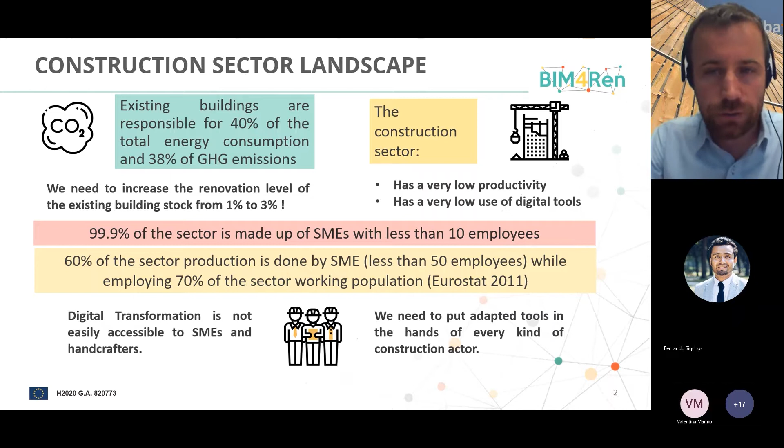And just to go back, the productivity has actually declined, and the labor force is mostly self-employed. So to put it very simply, not in graphs but in the shoes of those practitioners: if you have a 10 people company and you need to dedicate a few weeks to learn new tools, it's an investment. If you need to pay for those softwares, this is quite an investment.

And it's an investment which is even harder when there's not so much culture for research and development, or this kind of investment. So this is something to be seen as, not a disease obviously, but something that hinders the capacity of the sector, and that could clearly be improved.

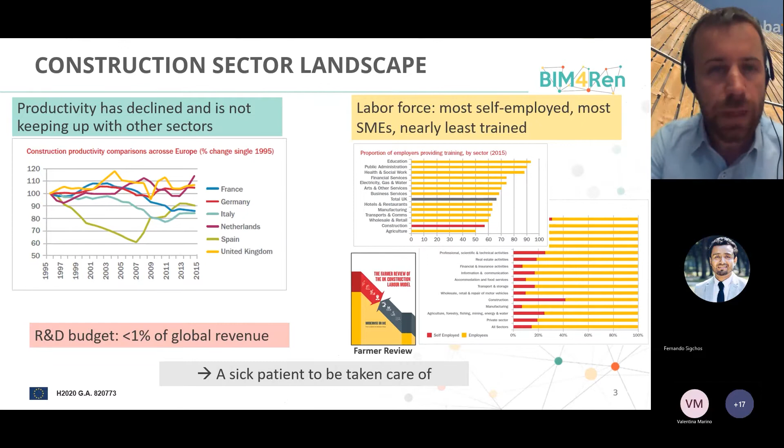Well, the benefits of digitalization have been proven. It improves efficiency, meaning efficiency in the collaboration, efficiency in avoiding waste, efficiency also for the energy environmental performance, and especially it allows narrowing the energy gap between what's expected and what is measured.

And behind this digitalization, there are lots of keywords, and more importantly, those are very deep knowledge areas for which there is plenty of investigation, but they seem to be quite far from the needs of the daily practitioners. So those technologies exist, but we do not use them, not to their full potential. And their full potential might not be to make them more complex, but rather more accessible.

So we need to find better ways to reskill and upskill the construction workforce. And so this is the idea, this concept of saying, okay, either we anticipate and progress, or we wait. And particularly to wait for this kind of change would not be a smart move.

Okay, so here we have BIM. BIM has a potential for renovation, but first let's try to say what BIM is. It can be seen as quite dual. It can refer both to the collaborative process, where across the life cycle of a building, starting from design, construction, operation, maintenance, and even end of life, it's a way to manage the information between the actors using a digital representation of a building, but it is also, as itself, a format, a semantically enriched model.

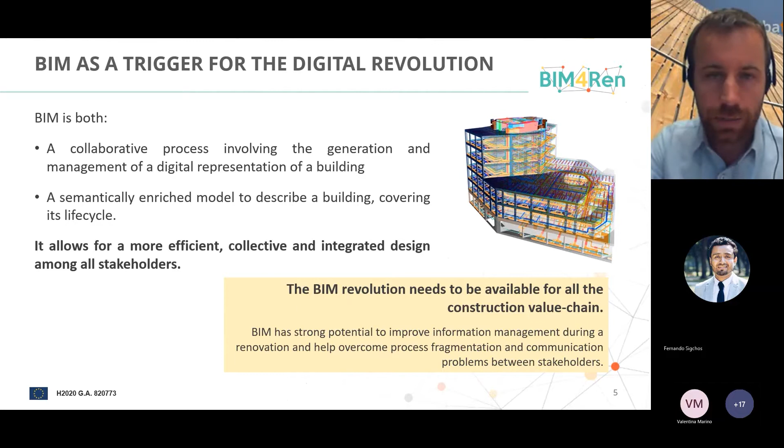And so why can BIM be quite relevant for renovation? The idea for this project starts with the very simple point, which is: for renovation, the building already exists. And with this building that already exists, there's plenty of information to gather. So what year was it built? If I want to do any renovation, what's the cost? What's the current energy performance? What's the geometry of this building? What's the state of, I don't know, like even the entrance, the window, the tightness?

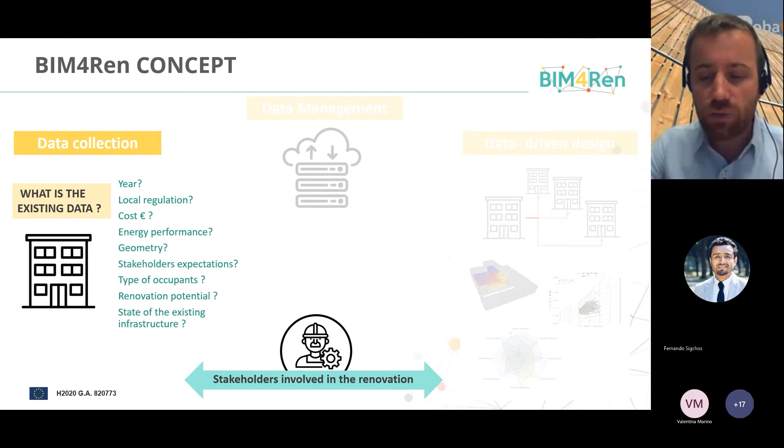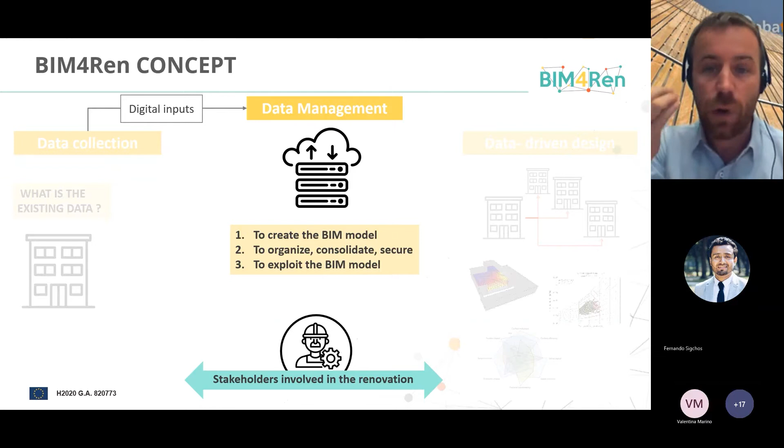What are the occupants? What do they expect from this renovation? All this information needs to be gathered. So there are ways to develop, to gather this information, and then to manage this information. Managing it means making it accessible to all stakeholders, organizing it, but also securing it. The idea is to exploit this information for the further steps.

The further steps involve designing the potential renovation scenarios. What if I change the windows? What if I improve the gas boiler? All those questions should be quite easily answered.

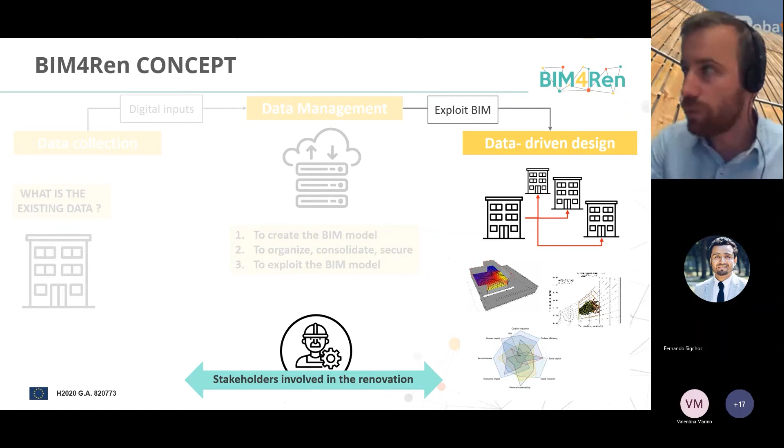With the idea that it should then be exploited by the on-site workers, the contractors, to use as designs for the renovation action itself. So those tools mostly focus on the preparation of the renovation, rather than full focus on on-site activities, and are integrated into a one-stop access platform.

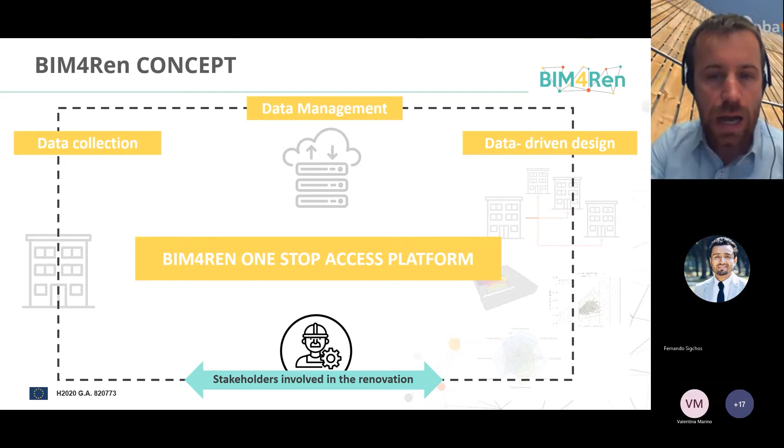This is now available, gathering more or less 30 tools developed in the project, covering data collection for geometry acquisition, HVAC system characterization, collecting the stakeholders' needs, and so on. It can also assess the potential energy performance of different renovation scenarios, and so on.

So you can have access. The easiest is to go to the BIM4Ren project, and from there have access to this platform where all tools are presented, with some workflows to guide the use of those tools.

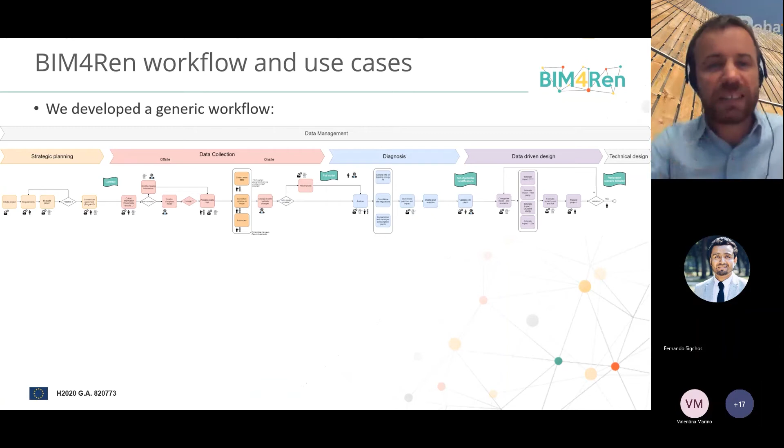To put it more practically, during the project we looked at practices related to the renovation project. We mapped as a workflow the different interactions between users and the data flowing around. We had an extended, generic workflow, but we made it a simple one.

It's about initial strategic planning, when the building owner mainly wonders: will I do this renovation? At this stage, they can contract a company. Then there is the data gathering, which can happen off-site or on-site, where you collect this information. The diagnosis is how you interpret this information to say, okay, this is the state of my building now, before renovation.

The design is about defining this renovation and then carrying it out, working on those renovation scenarios. Across all those steps, we need to manage this data and this information.

We used 3 different pilots, 3 different cases, not only different and complementary buildings, but also different actors related to them. In Spain, it was a privately owned building close to the seashore in San Sebastian, led by an SME specializing in facade renovation. In France, the focus was on a social housing organization managing almost 10 to 20 renovations yearly, looking at how to improve the process at an early stage.

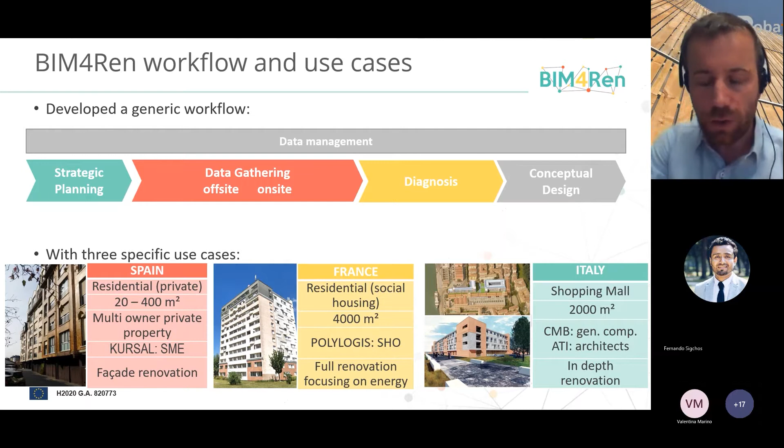In Italy, it was a large renovation, focusing on larger contractors, meaning a real estate contractor, a general contractor, and architects as a design team.

Just to highlight examples, you will see some demonstrations of tools. The idea is to start by gathering all information from the strategic planning stage. One tool is about extracting information from existing documents. You might have plenty of papers, printed or PDF information about your building, which might not be really exploited, like visit reports of the gas boiler and so on.

The idea is to scan this information and organize it so it can be easily retrieved afterward. This is the tool MassDoc.

Then there is WiseBIM, which I will present just after, about elevating a 2D layout into a BIM model. By doing off-site analysis, you get a model and information that lets you assess the current state of the building.

Then you can go further: I want to do some energy simulation. What if I improve the windows? What will be the impact? What should I do first?

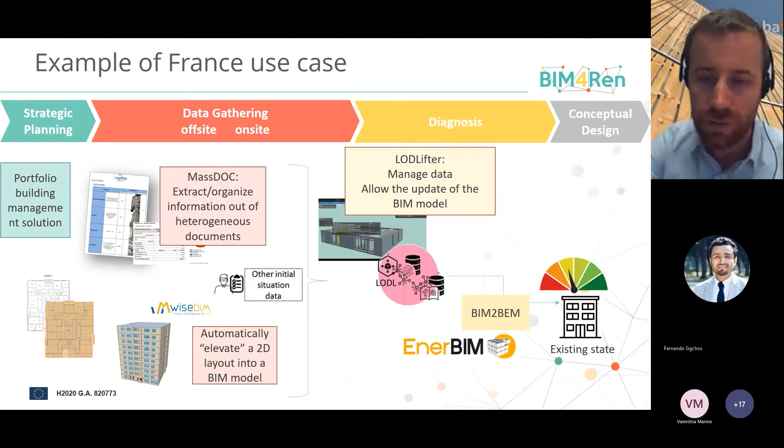Windows, the renovation of the walls, the change of the mechanical air renewal, and so on - this is the idea of assessing different renovation scenarios. And when you do that, you might wonder, what about the sun? If I want to add some PV panels? This is the BIM Solar tool that I will present afterwards.

But you can also assess what would be the cost, the energy consumption, the CO2 emission, the comfort, as a multi-criteria early analysis when you can consider so many potential renovation scenarios.

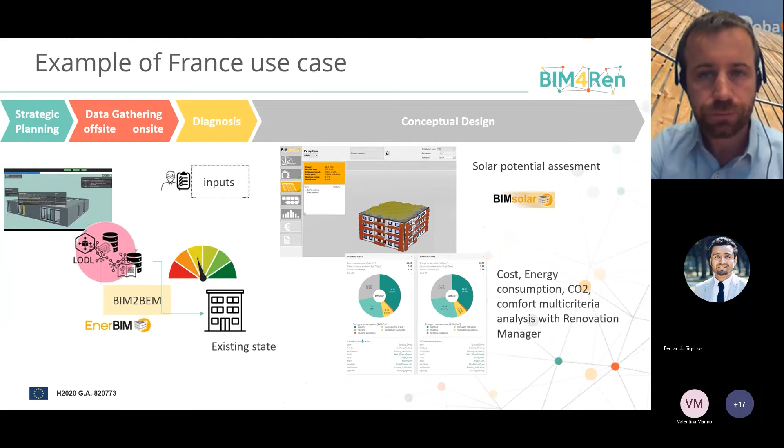And I'm getting close to the end. So what more or less we showed, our conclusion is that there are simple, fast, efficient tools that can help in this information management. This is something that we showed. There's plenty of room for improvement for sure. Those tools can be independent.

They can be used separately, but they are even more powerful when put together, meaning in a workflow. And the idea is what we want to focus on and strengthen is that while the project progresses, we can add more information. So if you start at the very beginning with a BIM model, even with low information, low level of detail, you can improve it.

By the end of the project, you have something which is more useful. It's important to note - it can be seen as a burden, an additional burden for the contractors. It's actually key to define what are the roles of the different actors. But in the end, it benefits all - it benefits the building owner, it benefits the contractors, and so on.

Valentina will present afterwards from GBC, that one of the outputs of the project is a white paper, but I would just mention a few of the key messages that we want to strengthen.

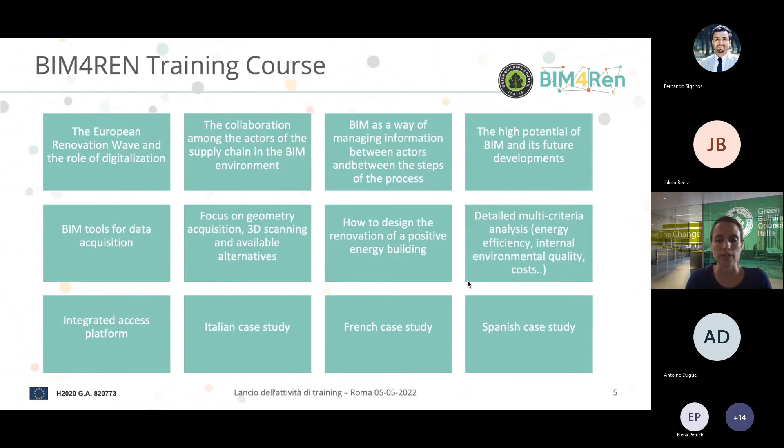The presentation of the 3 case studies in Italy, France, and Spain also presents the platforms, the OSAP and the tools. Specifically for the tools, there will be a part of the training where some of the presentations are collected that the tool developers did during the development of the project.

They showed some demos of these training tools, such as the one that will be presented by Antoine later on today. Where to access this training activity? We are about to finalize the website we call internally the legacy website, different from the main project website, where all the results of the project are collected. Within these results there will be a dedicated page for training, where you can find all the information and material on the training activity of the project in 4 languages: English, Italian, Spanish, and French.

The URL of the website is BIM4Renovation.eu. It will be active since the 30th of September 2022. What you will find inside, for each of the modules you saw before, is a little page where you can see the description of the module, the benefits, the duration of each module, and you will be able to download the presentation.

And for each of the tools, you will find again an explanatory presentation of the tool, and where available, also a video explaining the demo of how this tool works. So very soon, online, all the material from the training activity of BIM4Ren will be available.

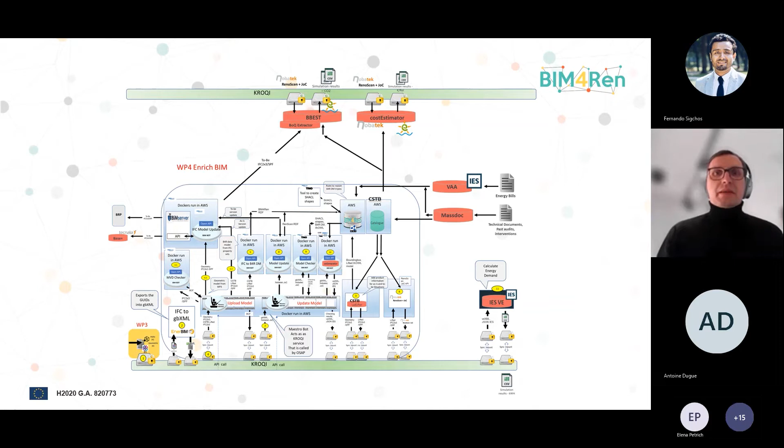Now, central to this, and you've seen the slides before, is this idea of binding different sorts of technology, different methods, different processes together into a platform. I'm going to scare you now for just a few seconds, because this is what it looks like on the back end, the technical view of our one-stop access platform. But since hardly anyone can make interpretation of this, let me break it down for you in more of an overview.

If we're dealing with an existing building, such as an average multi-story apartment building, then we face all sorts of information that we either already have in the form of conventional drawings. When we scan them, they're digital, but only in a limited field. We also look at how the building actually performs in terms of energy, make inventories and cadasters of what has been used to build the building, and we might even have truly digital information generated from existing drawings.

I'm sure you have seen these scan-to-BIM projects, where we try to scan things from a point cloud and then derive building information models from them.

Now the challenge is to bind all of these tools and kinds of information into a coherent data space, a so-called common data environment, to make them accessible to practitioners in the field, both blue collar and white collar, and to integrate this existing data into one particular model. Our approach in BIM4Ren, developing this framework of the one-stop access platform, was to integrate them using distributed graphs and a distributed network of models and information that can all be represented in a coherent space.

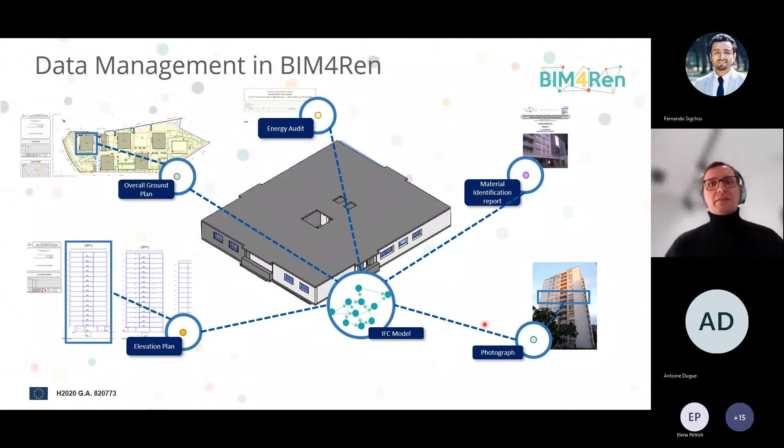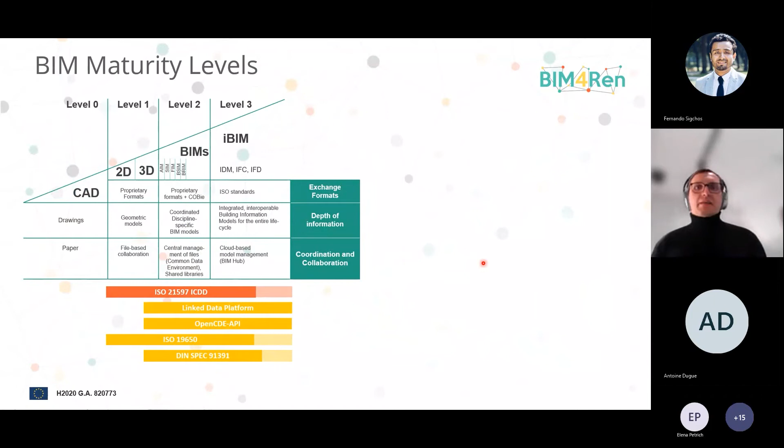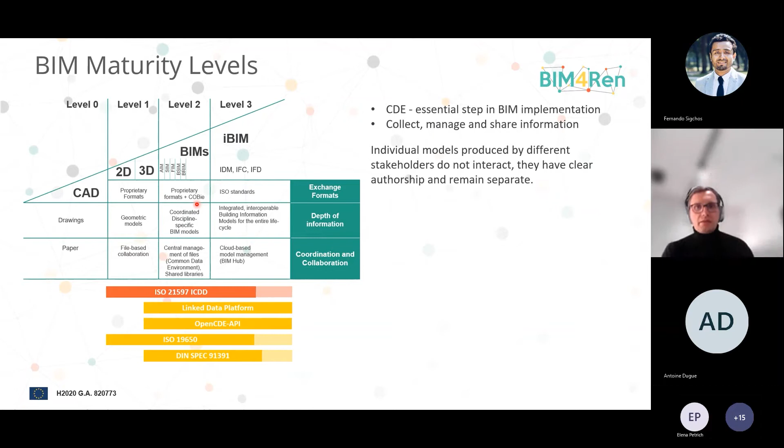For those of you who have started looking into building information modeling, this is the internationally agreed so-called BIM wedge that we agreed upon to move towards vendor-independent software tools and data exchange formats, allowing us to integrate heterogeneous information coming from different stakeholders throughout the whole life cycle. Parts of these are already developed in standardization criteria, and others are what we've contributed as a consortium in BIM4Ren, from industry software developers, practitioners in the field, and academia.

So one of the things we're striving towards, and where we've contributed in the BIM4Ren project, is coming to an interoperable way to bind all these information types together. One of the core concepts here, next to the service-oriented one-stop access platform, is this notion of binding heterogeneous information into containers - looking at how we can take these different sorts of information and bind, knit, and web them into a continuous graph.

So if we have a particular building, a particular energy audit, and things like material reports that give us very specific information, how do we actually bring them together, and how do we use all the tools, some of which we'll see later? How do we take them, and the information they produce, but also the information required to do things like the energy audit, and bring them into a coherent common data environment? This is just a visual part of what we did in this project.

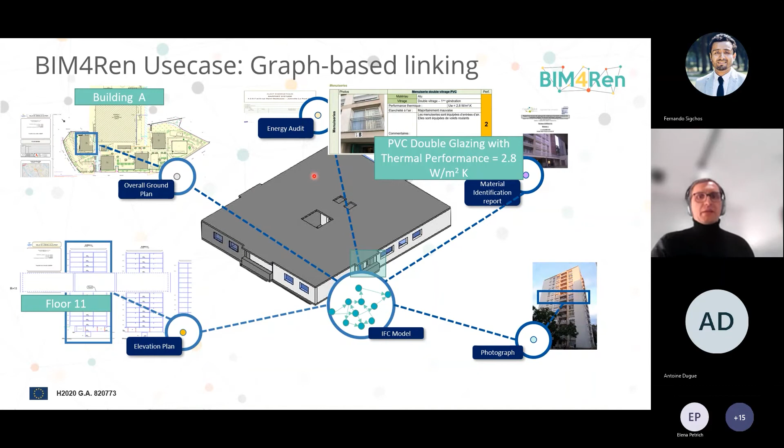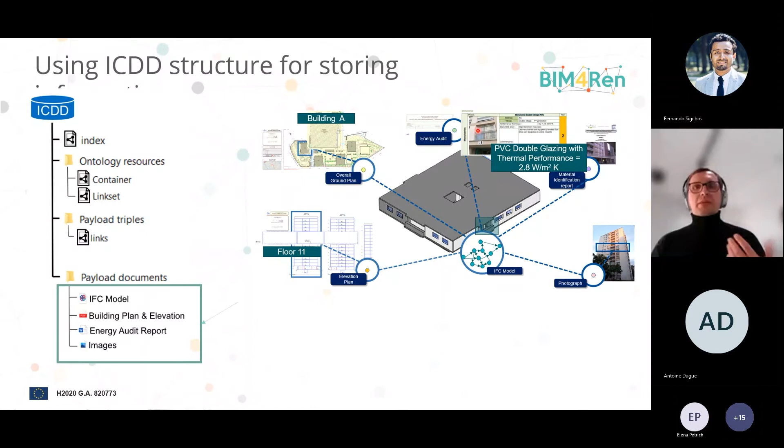We bind these things together in so-called information containers for linked document delivery, where we're able to take one particular kind of information and transfer it into another kind of information usually required by renovation processes. This is based on what we've looked at in process models, and what we've identified as the necessary input and output to these operations. This is a visual way to present this to you in a short way.

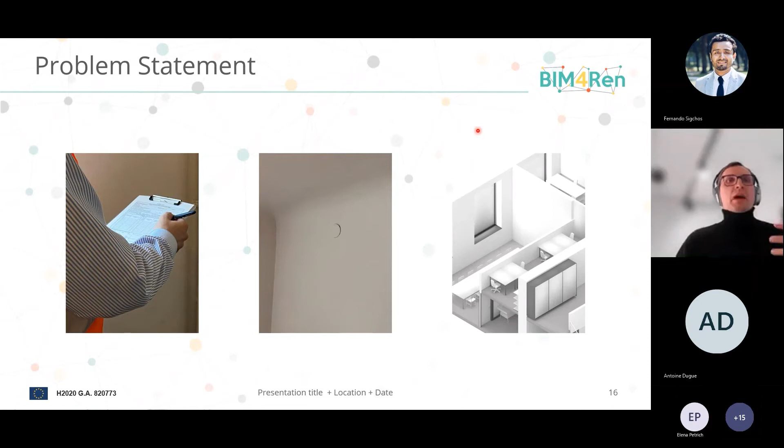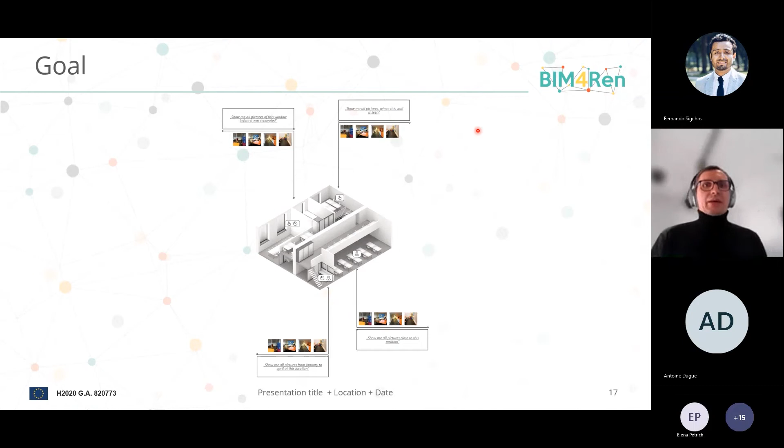To make things more practical, let me present the first of three tools we're going to show you this morning: the context-aware image acquisition tool, which has been customized and tailored to exactly these renovation needs. The approach here is to overcome the huge amounts of information purely handled on a paper-based trail, and to digitize information that is very specific to renovation tasks. We need to acquire information about existing buildings. So to overcome this challenge of mostly analog ways of working, we're introducing one of these tools, which allows you to capture information right in a digital model.

And here's how this looks like. Much of the information, if you don't have any information at all of your existing building, such as an apartment building, then at least you're going to have some sort of either digital, scanned, photographed, or even sketched floor plan.

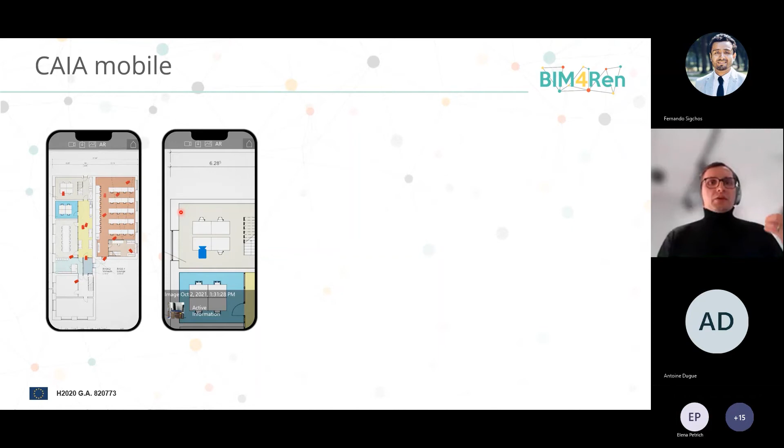And this CAIA tool now allows you to register your position using a standard cell phone, to register yourself on the floor plan, to walk through the building as an architect, for example, make a first assessment of the building, and to make visual annotations, audio annotations, and photographs of where you actually are.

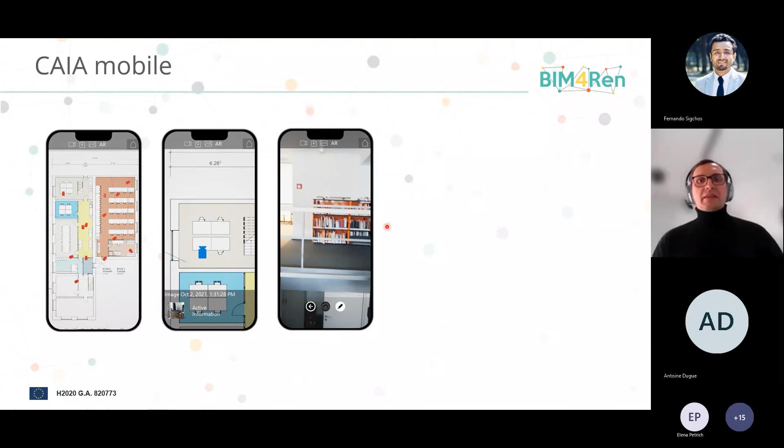And the novel thing here is that we can couple what you actually see and where you take notes about, and the annotations that you make into the room. So this blue camera icon represents actually where you are at the time of making the annotation, either on the floor plan or if you have the 3D model, to make annotations about this.

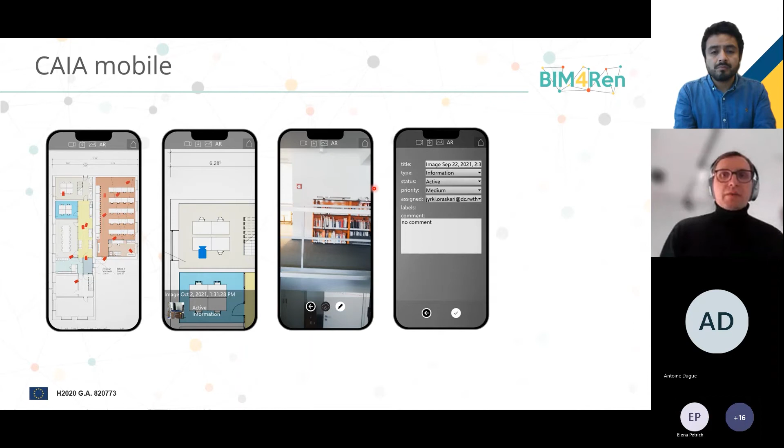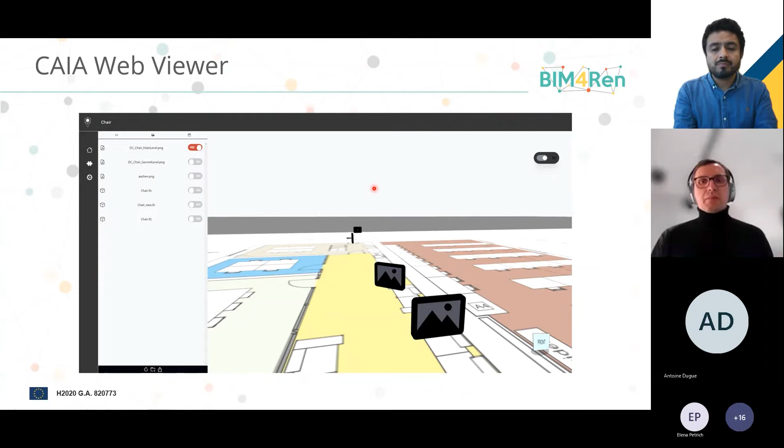Make your comments on what you have stumbled upon there, on the issues you have to address during a renovation process, or on the issues that you stumble upon while renovating and while making it fit, and then actually transfer this into your digital 3D model, because the position and the orientation from which you have taken the photos and made the audio annotations have been recorded along automatically with standard hardware.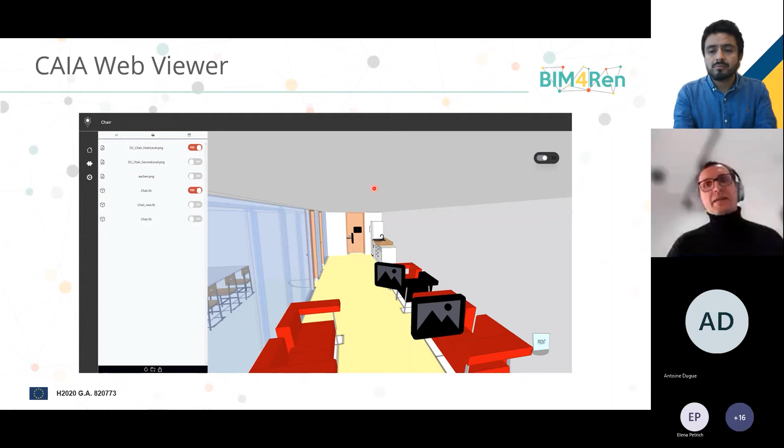So things that architects, for example, have in their pockets anyway, and made this available by a standardized information format, the so-called BCF format, which then allows you to use the software that you're already using in order to capture things in reality and in existing buildings.

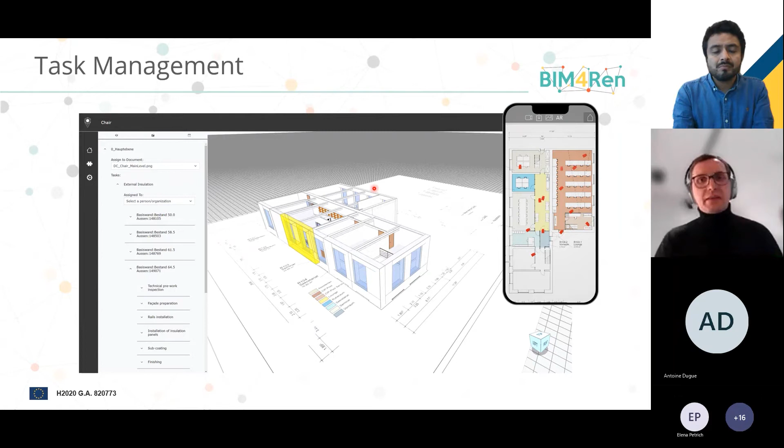This is just one of the tools that we would like to introduce to you. And now I'll give over to Antoine again to introduce two additional tools. Thank you very much.

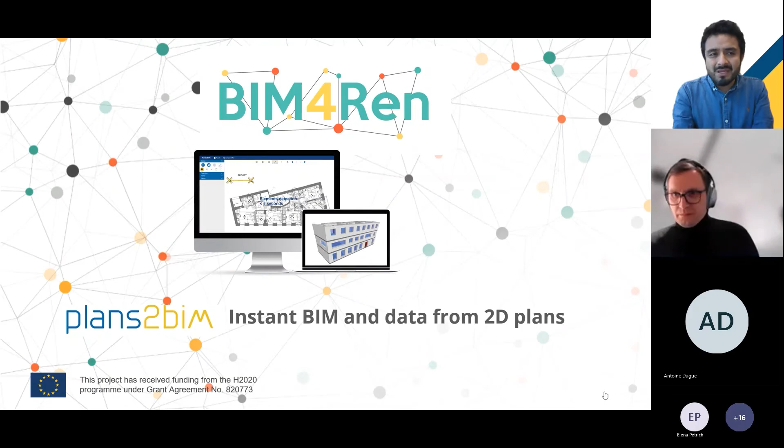Thank you, Jacob. Indeed, it was a very, very good exercise to summarize all that in 10 minutes. Please go ahead now, Antoine, the floor is yours.

Okay, so following Jacob doing some demonstration, I'll try to do it myself. I might go with a live demonstration depending on the time frame, hopefully. So the first of the tools—I will present two tools.

Jacob actually focused on the very initial data gathering, on-site collection of information, both geometrical and other kinds of information. Here we are going to check two different tools: one about how we can exploit 2D layouts and transform those into a BIM model, and another one about, once we have this BIM model, how we can use it, in this case, for solar evaluation to assess the solar potential of the building and potential installation of PV panels, and so on.

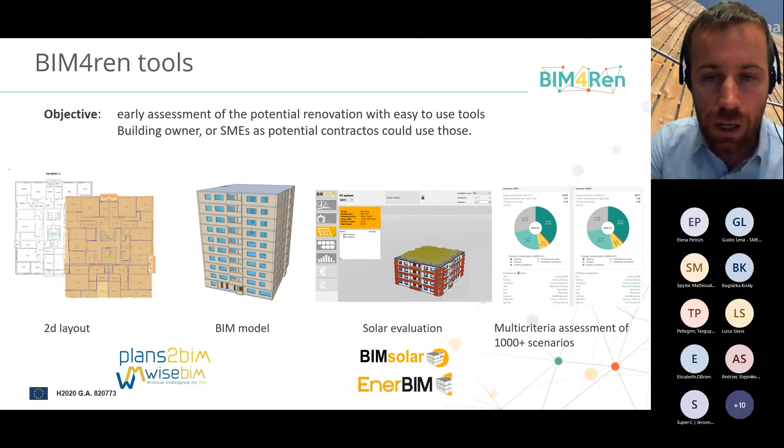So this is normally at an early stage of a renovation project, when you are still, as a building owner—if you're a social housing organization, for example—wondering what kind of renovation could be carried out, or it could also be for contractors or designers assessing that for a building owner. So the first one is developed by WiseBIM.

WiseBIM is a French startup, an SME, and they are using the potential of artificial intelligence in assessing and analyzing a 2D layout. It could be a PDF, PNG, DWG—it doesn't matter that much.

You can even scan it—if you have it printed, you can scan it, import it as an image, a PNG, and it will detect the walls and the windows, because there are some conventions in the drawing for those elements. So it will detect that and transform it automatically into a BIM model.

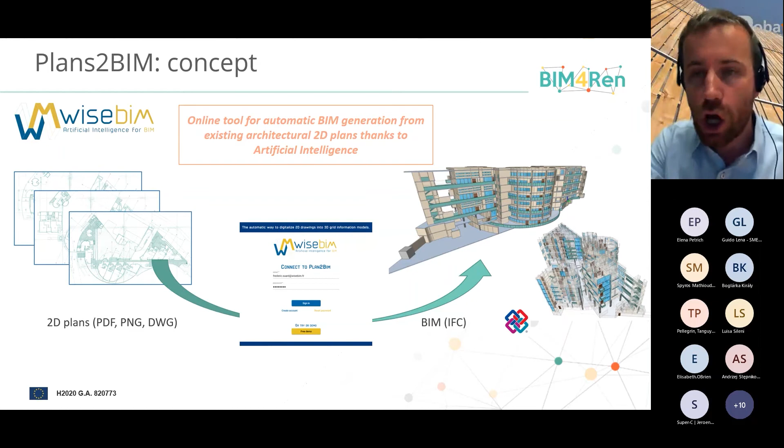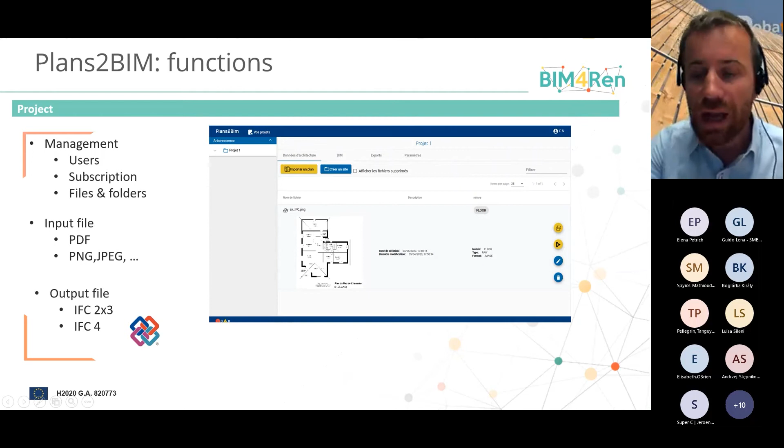Let's try to see it with a bit more detail. So what you do if you access the Plans2BIM software—well, there is a management layer just for account sharing and dropping the files. Then you can import this file, typically such a 2D layout, and in the end you will receive a BIM model in different formats, from IFC.

And so what it has as features is once you have imported the layout, it will recognize, in this case, the walls in red, the windows—the opening—in yellow, the slab in orange, and it will be based on the scale you have to put as an input, and the spaces, the rooms, let's say.

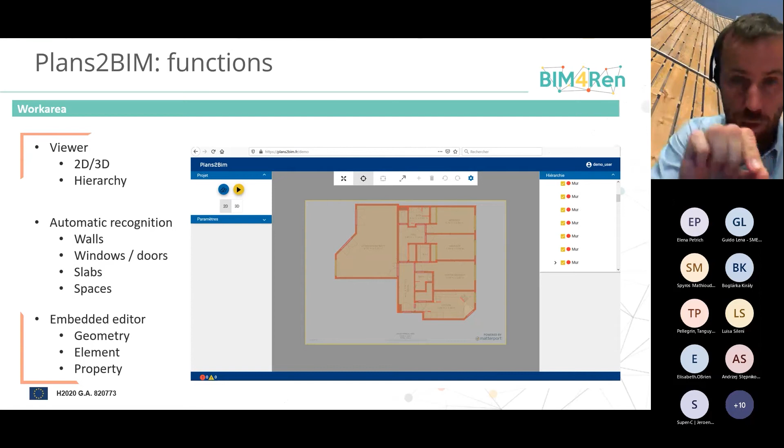And if there are any potential errors, or if you want to adjust it, you can easily do that, to add a wall, to correct, to move some points, and it's all online.

So there are two main use cases. One would be if there is an ongoing process, but it's not yet a building, and you want to digitalize it and go for BIM, it could be done based on those layouts. But for a building that is already built, either you have existing layouts, or you can use different kinds of tools for collecting this kind of layout, either through scan or surveyor.

It can, in this case, with off-site modeling - this is one of the examples we had in the project - also, let's say, 5 towers in the suburbs of Paris. So out of quite business-as-usual layout, we have this possibility to create, as you can see, one floor here, and you can even see the elements, the objects composing the BIM model.

And when it's elevated with just 4 floors, it gives a very quick, efficient way to have this first BIM model. It could be compared to this kind of scan, where you collect points, and from those points you then create the BIM model. It's not the same accuracy for sure, it's not the same objective, it's not the same cost. But in this case, it's aiming at a low cost, quick model.

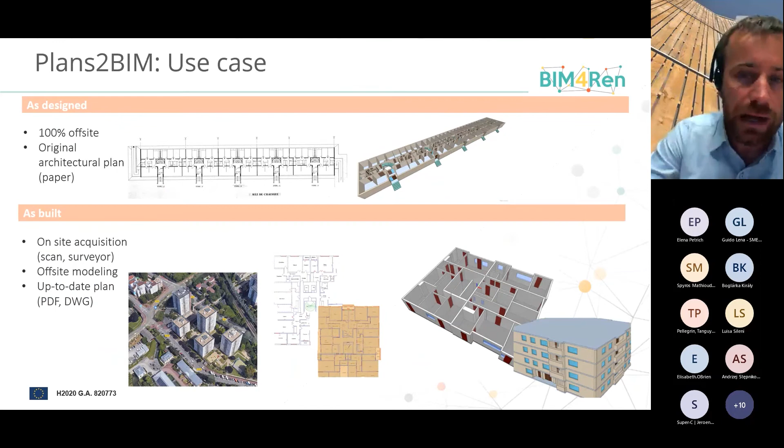And well, this is the idea. What I want also to stress is that in these projects, meaning WiseBIM, they are also doing something which is not so mature yet, but working on doing the same kind of development for HVAC layouts - for these heating, ventilation, air conditioning layouts, which are also quite typical.

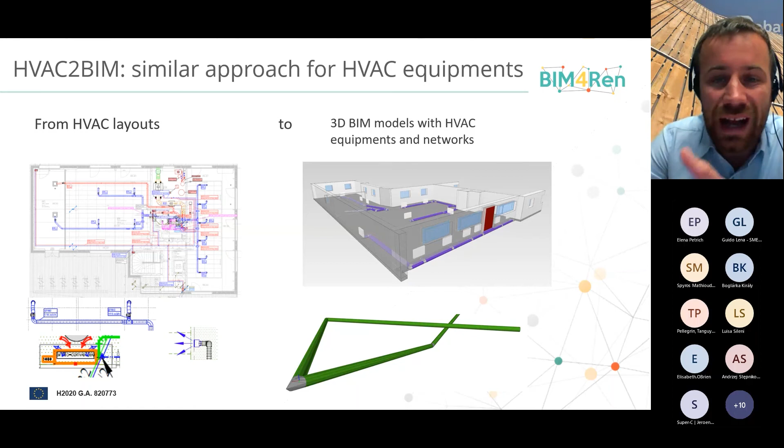You can also see that the reddish is for the hot water, the white, the blue - it's either in and out, and you can see that it's based again on templates. They recognize those templates automatically and are able to integrate that into the BIM model. So it might not be as mature, but you can see how artificial intelligence can, in this case, solve what we could present as quite practical problems.

So as a summary for Plans to BIM, it's a SaaS, meaning it's online. You can have access to it, you can register, you can create free accounts. Regarding the business model, it's either one BIM coin - you buy one and you can export one model - or soon there will be some monthly subscription with a fee.

It's really easy to use. There are tutorial videos accessible. There's this internal integrated editor where you can modify the layout, modify the BIM model. You can actually do all of that, and you just pay when you export the model, if the model is okay. For example, if you're not confident enough in the initial layout and you realize it's of poor quality, you're not going to export it, and so you're not going to pay.

So more or less, as a summary, we can say that you can have this first BIM model in 10 minutes. It's really achievable, and more or less the cost for one model is 20 euros, and it's absolutely operational. So you can test it yourself by going to this Plans to BIM website.

Another tool is BIM Solar. So the idea there is for urban planners, architects, energy consultants, when they are wondering, should I install PV panels on my building? To make it simple, we all know that question can arise, and with energy prices increasing dramatically, the question should be asked even more often.

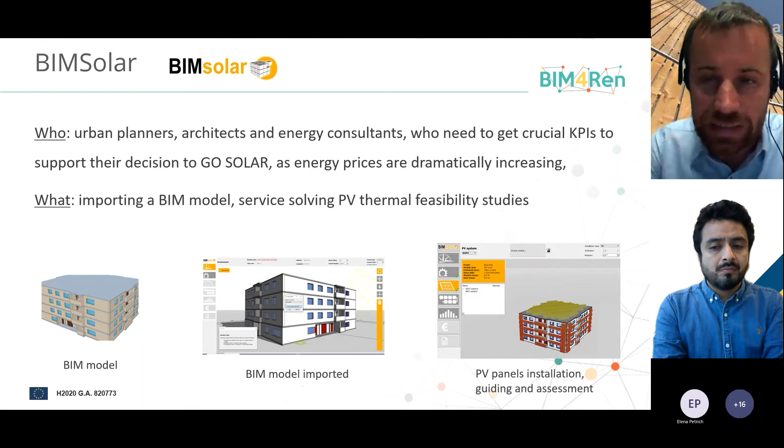So with a bit more detailed presentation and with some animation, I don't know how it goes with the live transmission, but it's a desktop software, not an online tool, you have to install it on your own computer. It's free. It's to assist in this solar design, you are not going to modify the building, just install those PV panels, and it has access to information related to the panels from the BIM object database.

The information comes actually from the manufacturers themselves. So as you can see in this short demo, you can see how you place those PV panels, arrange them, and so on. And yeah, it's based on OpenBIM.

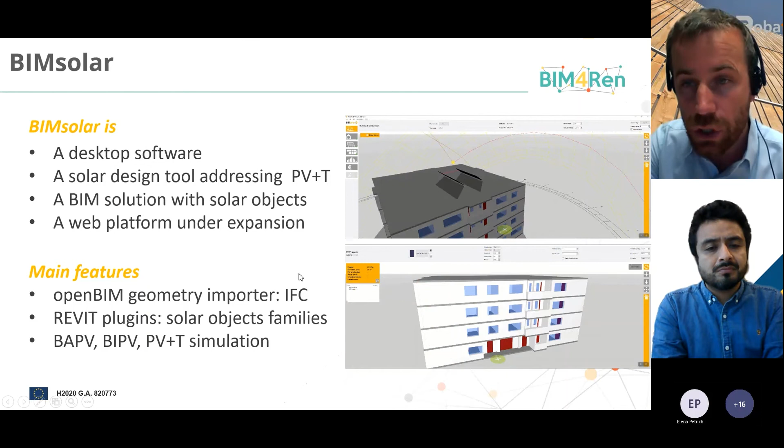There is also a Revit plugin that exists, and again a huge database. And once those systems are installed, there is even a guide for the electrical wiring, just to put it simply. Then there is an assessment for each panel, or for a group of panels. You can see either yearly, monthly, hourly electrical production. You can also see the losses due to the current in the wiring. There can be a cost assessment and even self-consumption scenarios based on hypotheses that can be refined.

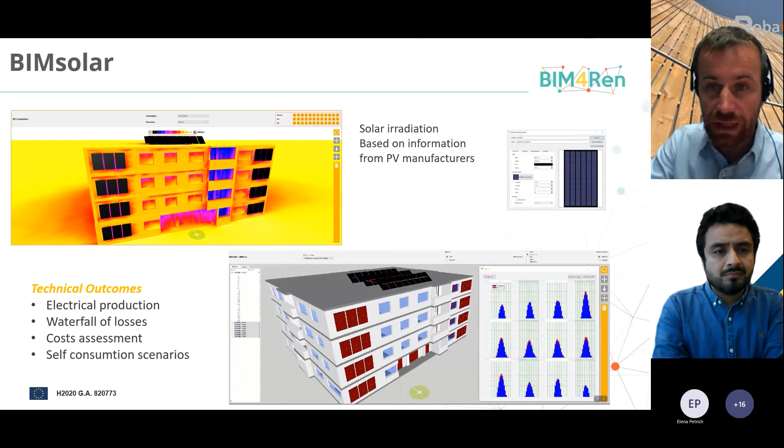So that's the idea. I'm not sure actually I shared it. I'm just going to. I think it's possible. Yes, yes, okay. Thank you.